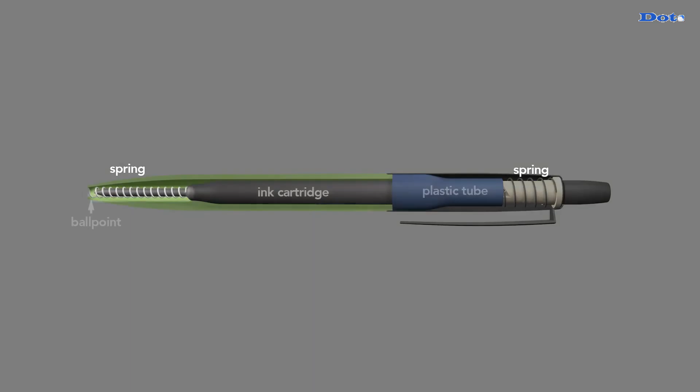The pen's barrel houses an ink cartridge with a ballpoint tip, 2 springs, one at the top and one at the bottom, and a plastic tube which is press fit inside the metal barrel of the pen so that it's fixed in place. Inside that tube is where all the action happens.

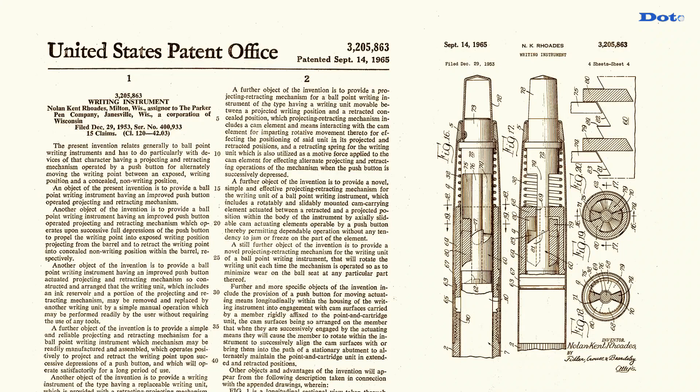A Parker Pen Company patent describes the 3 parts that produce the pen's click: the cam body, the tubular plunger, and the stop members. The cam body is affixed to the top of the replaceable ink cartridge. During operation, this cam body rotates and slides up and down. The tubular plunger does not rotate. It only slides up and down. The stop members are shown as separate pieces here, but keep in mind they're part of the press-fit plastic tube and so never move.

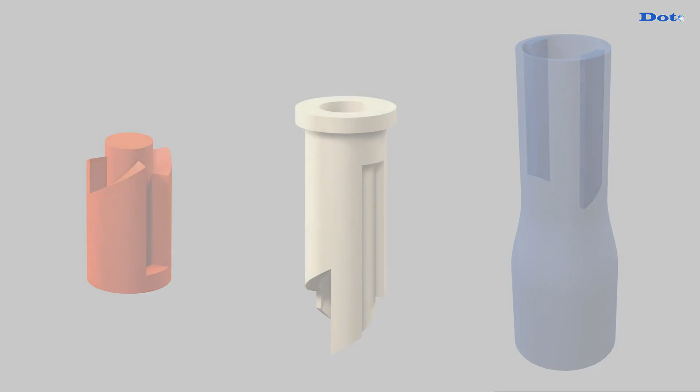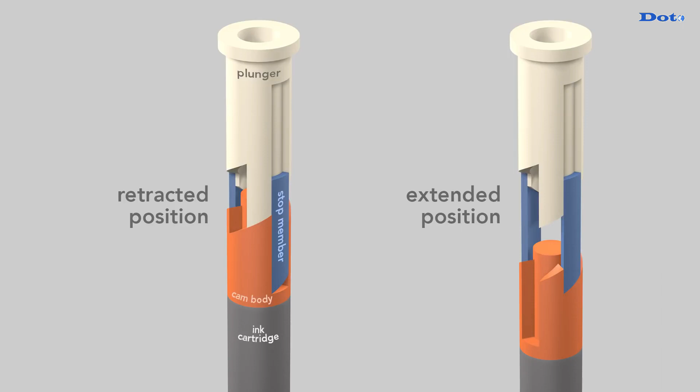The pen can be in either of 2 positions: the retracted non-writing position where the tip of the cartridge is inside the barrel, or in the extended writing position where the cartridge's tip projects from the barrel. To see how the plunger, cam body, and stop members interact, I've broken the cam movements into 8 steps.

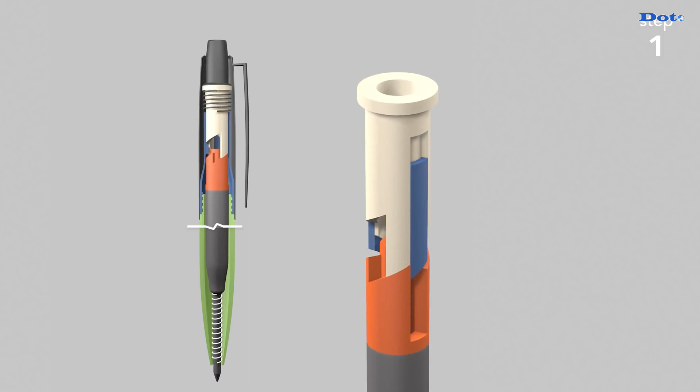First, push the button to drive the plunger and the cam body down the barrel until the top of the cam body drops below the fixed stop members. Second, remember that the spring at the bottom of the pen pushes the cam body up and so keeps it in contact with the plunger. That axial spring force shoves the cam body up the barrel, but also rotates the cam body because it mates with the plunger at an angle. The cam body rotates 45 degrees until it strikes the surface of the plunger. That very fast motion creates the first click.

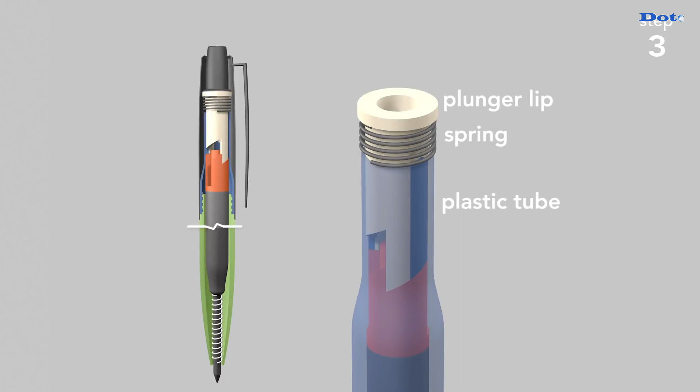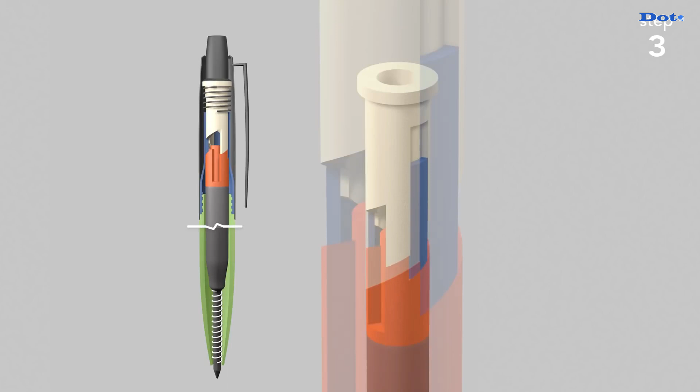Third, I release the button and a spring between the plastic tube and the lip of the plunger forces it to the top of the pen. When the tips of the plunger's fingers clear, the cam body rotates another 45 degrees until it strikes the blue stop members. That's the second click of the pen. Fourth, I release the button completely, and now the cam body remains locked in place. It cannot rotate nor move upward, and so the pen is ready to write.

To retract the pen, I press the button to drive the plunger into the cam body and to push it past the stop members. The cam body rotates until it strikes the plunger. That's the third click. I release the button so the top spring forces the plunger upward. When the plunger fingers clear the cam body, it slides and rotates 45 degrees until it strikes into the stop members. That's the fourth click. Once the button is completely released, stop members slot into the cam body so that when the plunger moves up, the cam body moves with it to retract the ink cartridge.

In extending and retracting the ink cartridge, the cam body rotates 45 degrees 4 times, or 180 degrees total. The cam body has 180-degree rotational symmetry, so that the next extend retract cycle repeats the same sequence of steps.

This particular model of pen has sold over 750 million units since its debut. It took a team of 66 people to design this pen, and although it's a mechanical marvel, the Parker Company worried that this retractable ballpoint ink pen would damage their reputation. Parker pens were fountain pens. And so the company left off their iconic arrow clip.

But within 4 years, the pen earned its arrow and inspired other pen makers to design click and lock mechanisms, all different to avoid patent infringement. The clicking of a pen demonstrates how a single engineering problem can have many engineering solutions, ranging from robust to cost-efficient to unique.